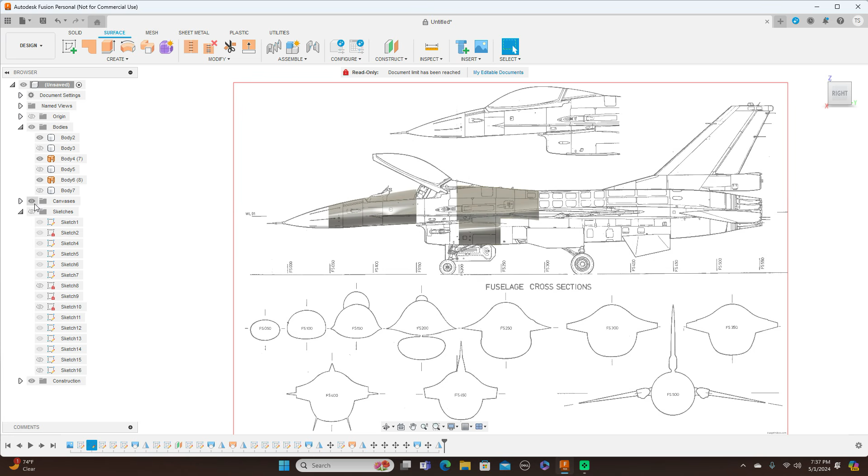Sometimes when you model an airplane, you can't use forms because certain parts are just too complicated, like the intake for this F-16, for instance. It has a different shape up through here. Let me turn this off so I can let you have a good look at it here. Turn off the canvases, okay.

Now what we have, as you can see, this section right through here is flat. So it's actually a couple of parts. It'd be quite difficult to use a form to get that shape up there like that. So if you can find pictures of the formers, use the formers for that shape. This front section up here is just a solid.

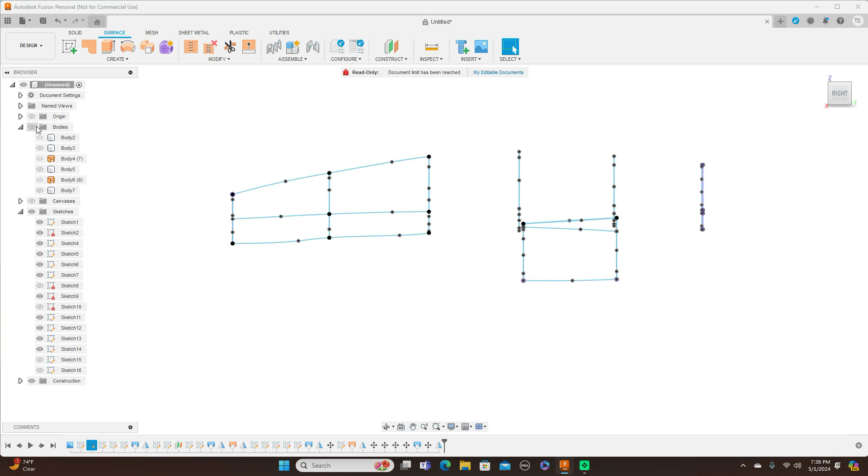And that was done with sketches I drew first. I'll turn the sketches on, as you can see, and I'll turn the bodies off. These are all the sketches that I did first.

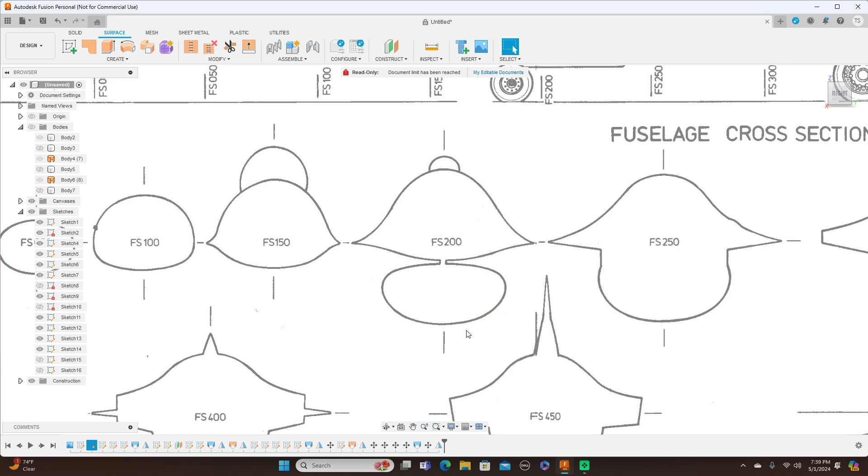Let me go down and turn the canvases back on. This one right here, which is FS 200, as you can see, 200 right here, this former is actually one piece. So what I did is made this into two pieces, and also this one back here into two pieces also, to get the shape right up here that I needed.

Now the rest of this throughout the back, it doesn't have to be two pieces like this here. What I did was separate this piece and this piece right here. So let me show you just something quick here, how I did that.

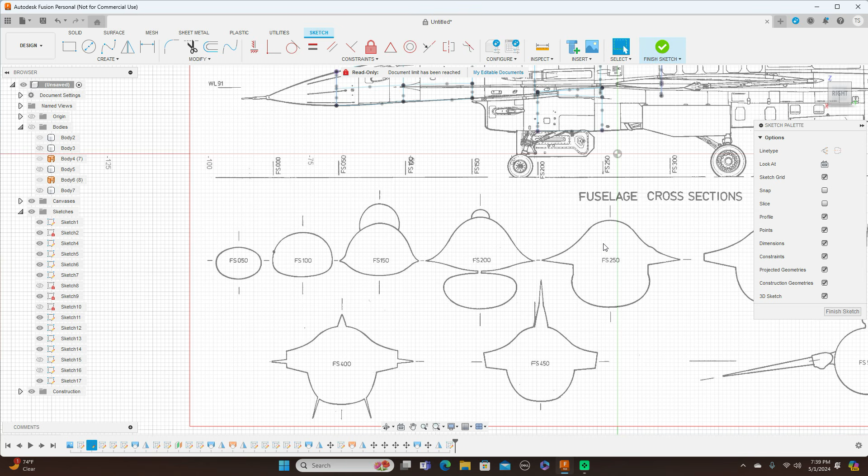So the first half, I just drew a line. It's just one of many ways you can do this. I just drew a line here, a line down here. And these are not the best pictures to use -- they're not symmetrical.

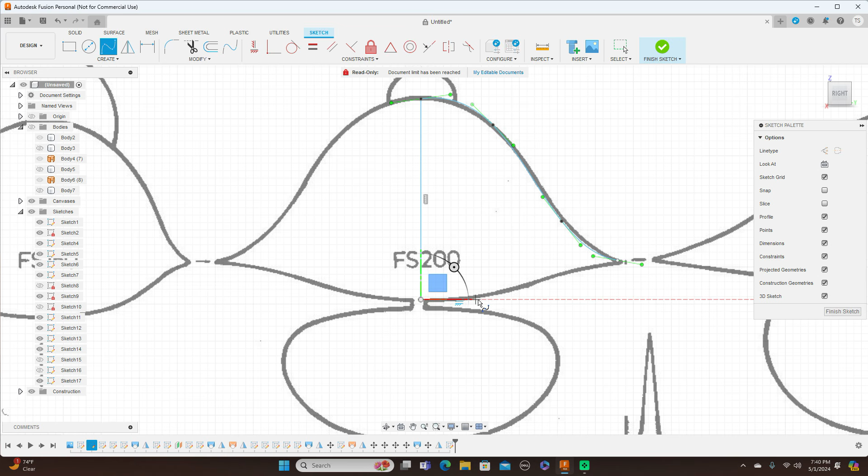Now with this, I make sure that I always have a point right where this needs to be, because that's my line on where I line things up with. And so that's how I did that. Just drew half of this.

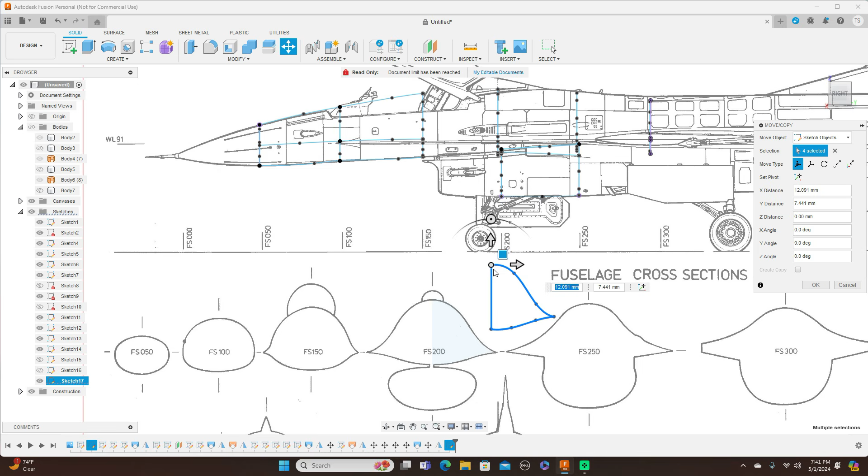Then what I ended up doing after that is just moving this up to here where it needs to be. To move that, you just click Move Copy and select the point that you want to move, and then you select all the pieces of this. Then you move this into place to the top, like I did up here. This one's right up here, and then you just rotate it. But make sure you select this first, because when you rotate this, this stays on this plane right here.

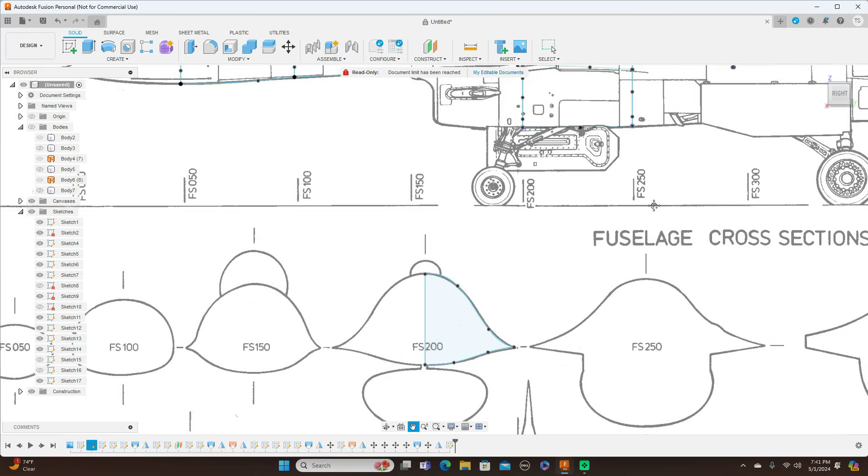But that's why I did that. And then the bottom half to it, like this half down here. Now, I looked at this piece over here too, and this over here.

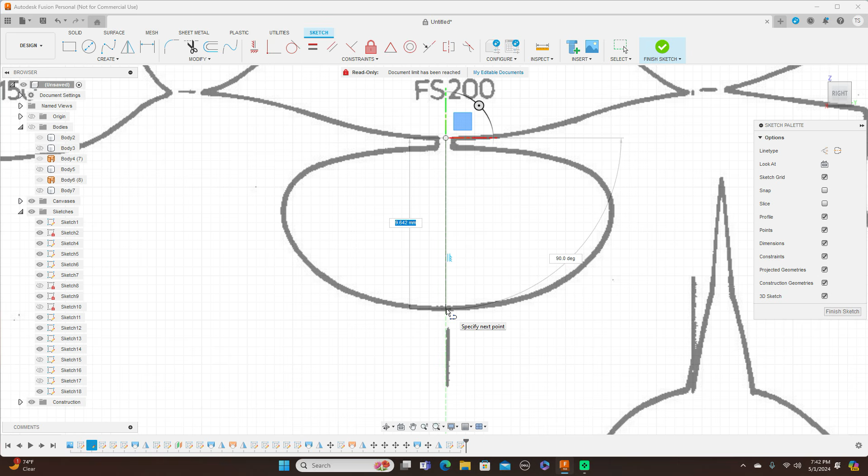And what I am doing, let me turn this off. Create another sketch on this plane here. Drew a line first, and I drew it up to here. Then another line.

Now this snaps in all the time. If you don't want to turn off the snap and you just need it not to snap in right away, just hold down the control key and then it doesn't snap. So hold it where you want it, then go ahead and hit it. Then I use a fit point spline to finish the rest of this out.

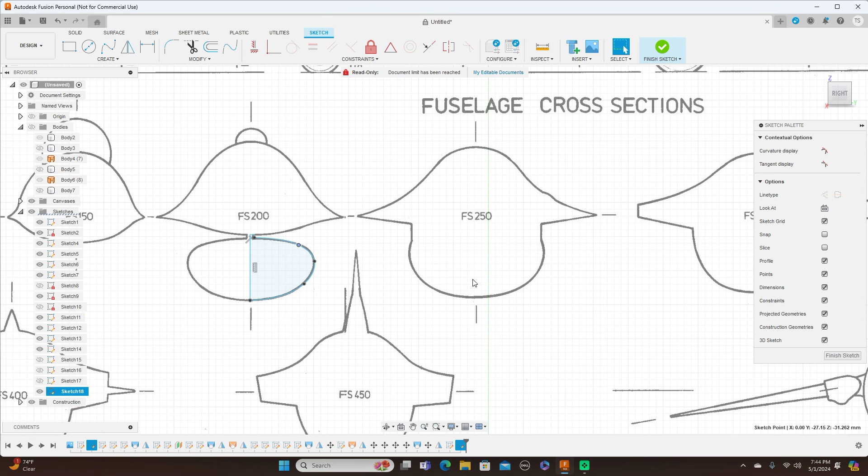And once you got that to where you need it, then I just move this up here the same way, to where it needs to be up here. And also, when it came to this former here, same thing, I drew a line.

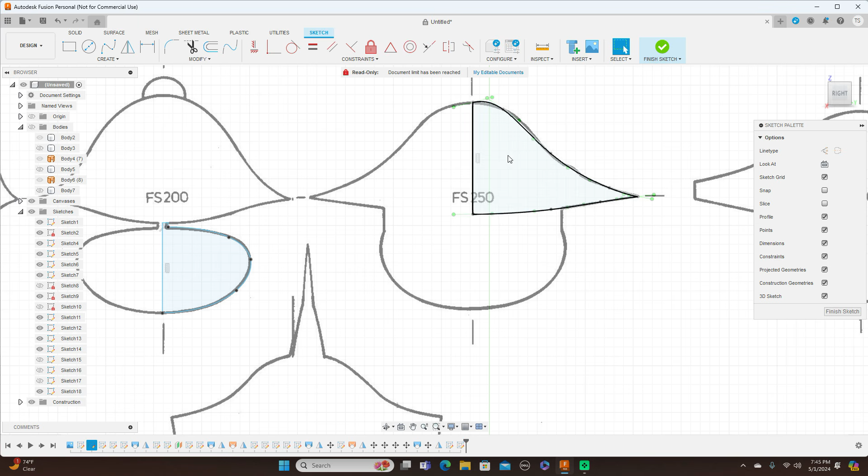About right here. But let me do something first before I do that. I'm going to draw this top portion of it first. So I draw a line from about, just imagine this coming over here towards the center. Click OK, then fit point spline, then another fit point spline, and move this over to here. Okay, so this was the top one that I drew. Let me finish this and turn this sketch off.

And do another sketch, this plane here. All right, let's see here. Draw a line first. I can see about right here -- it could be a little higher if you want to. All right, then use that fit point spline.

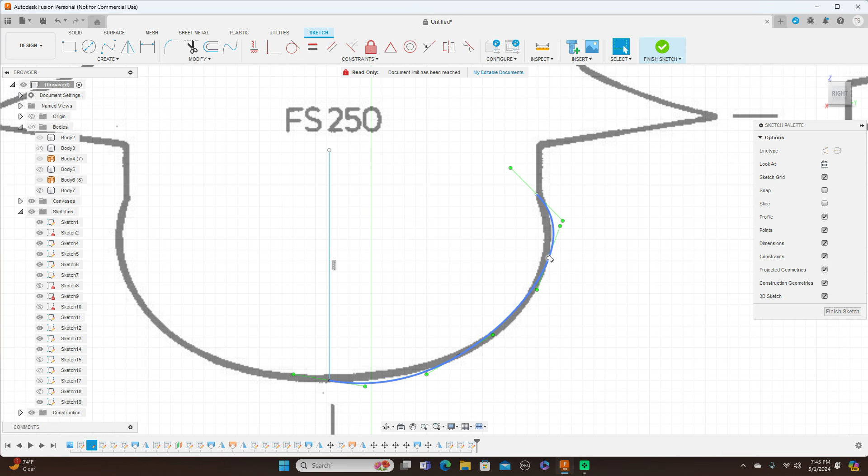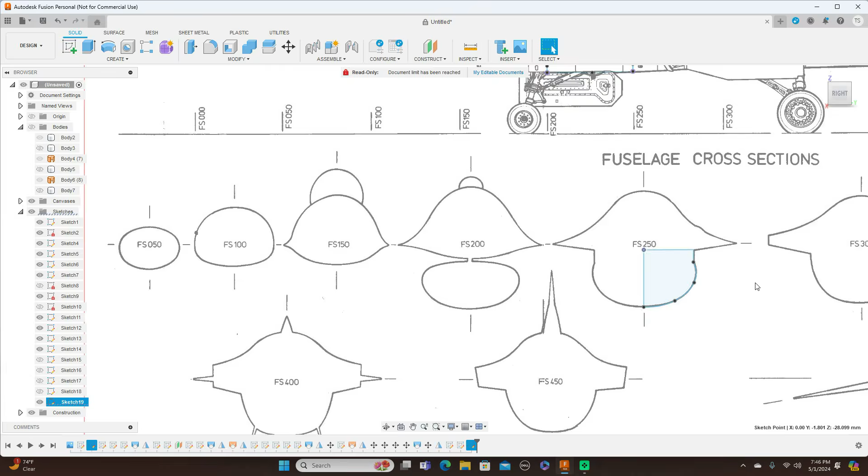And a line. Okay, go ahead and finish sketch. Now we have both of those up there like that. This intersects right through here, which we want, so you won't have an empty space. When you loft this and loft this, there won't be an empty space. But anyway, once you get all your points in here and stuff like that.

Get everything lined up, then you begin your lofting process. It's best to put all of the formers in here at one time. They give you a really nice smooth curve. So what I'm going to do here is just do a couple sections of lofting, to show you what I mean by doing everything here. So I'm going to turn off these sketches, or let's see, maybe just start a new model and do it that way.

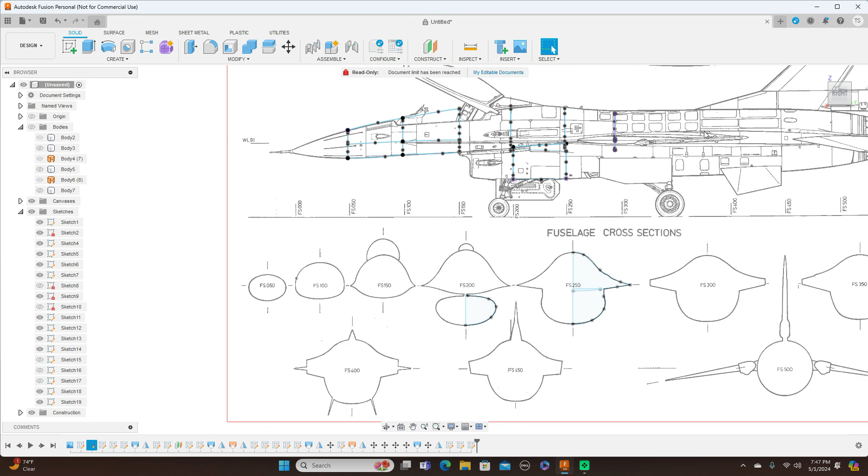Okay, what I'm going to do here, close that, and come over here, File, New, insert canvas from my computer, picture some F-16. All right, open that on this plane here, drag this out. And you can put in the top and the front view as you need it. For now, I'm just showing you guys how to do this.

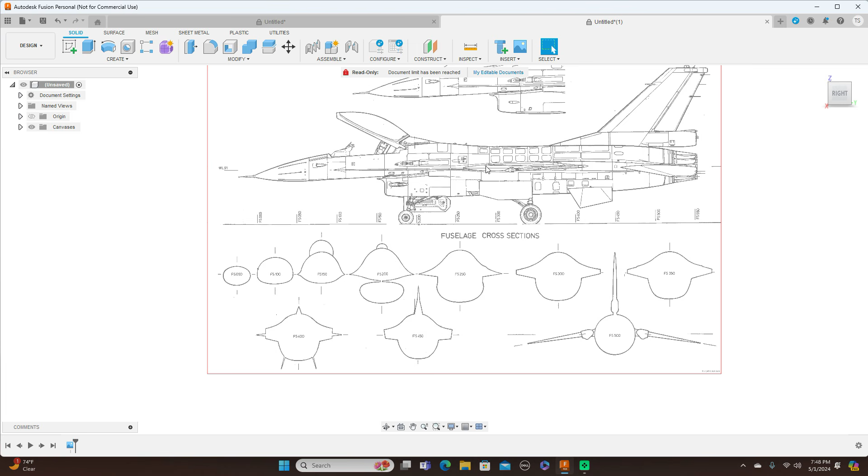Okay, so this is what we have at first. And you can scale this if you want to, but I'm not going to do that for now. I'm just showing you guys how to do this. So,

Let's see, I'm just going to do a couple sections here. So, create a sketch on this plane here. Use the line tool. About right there. Then use a fit point spline. Make sure this point lines up with this line right here. Another fit point spline.

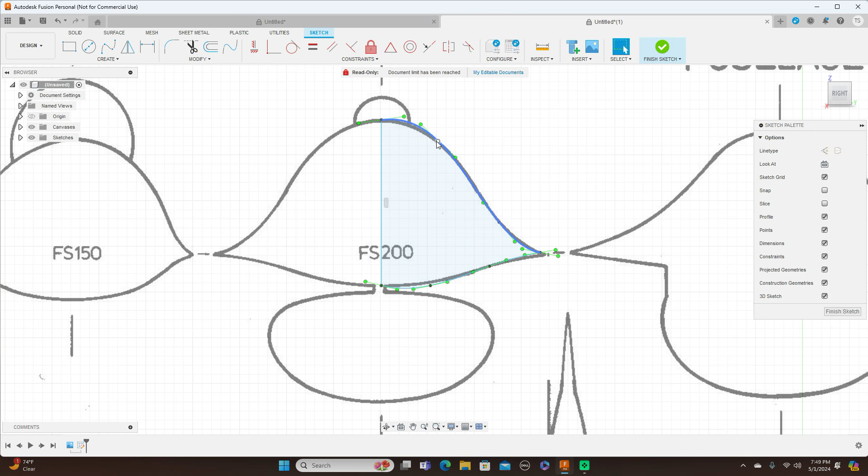Now, the bottom shape here, I'm just going to sort of match that through here too. So, draw a line first. Click OK. Fit point spline. This up. Okay. Okay. And finish sketch.

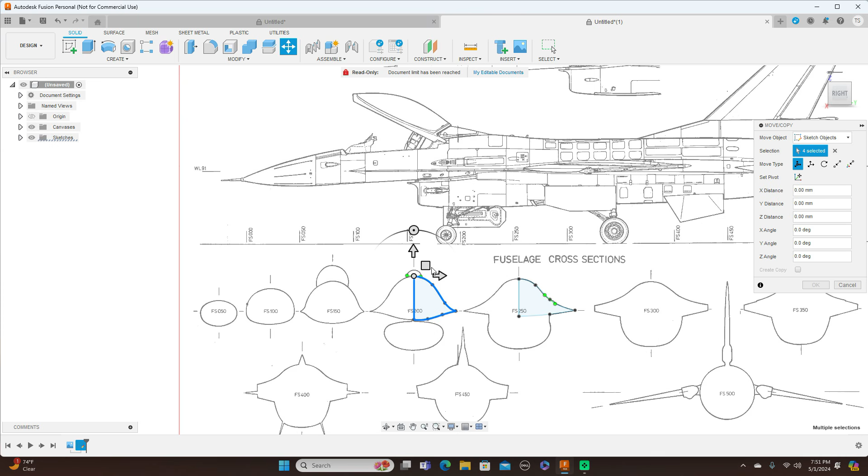And I'm going to move this up to here. So come up here to move copy. And again, make sure this point is selected. And this is the top of the 200. But what we need to do is look at this point right here. So this needs to come down. About right there. Right where this wing is.

Then look at this from the top and just rotate this 90 degrees. And click OK. And move this up. Same thing. Move copy. Point there. And move this up 250.

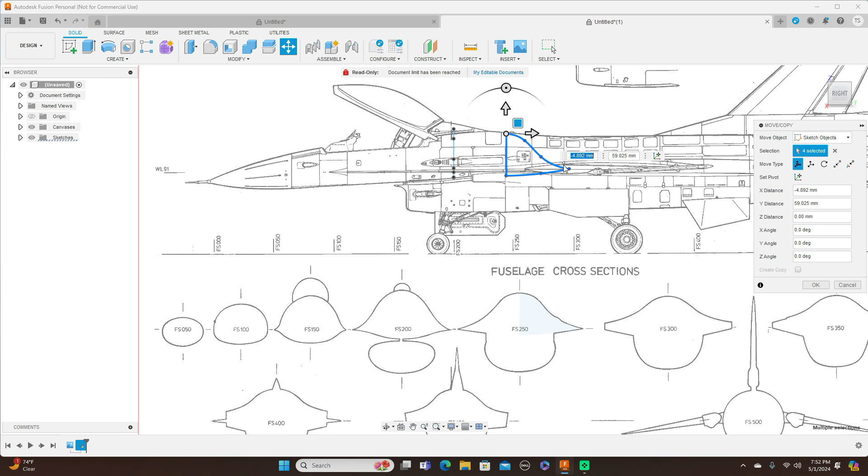Again, we're looking at this as on the wing. So this needs to come down just a little more, this front one. No big deal for now. Then look at the top. Rotate it 90 degrees. And click OK.

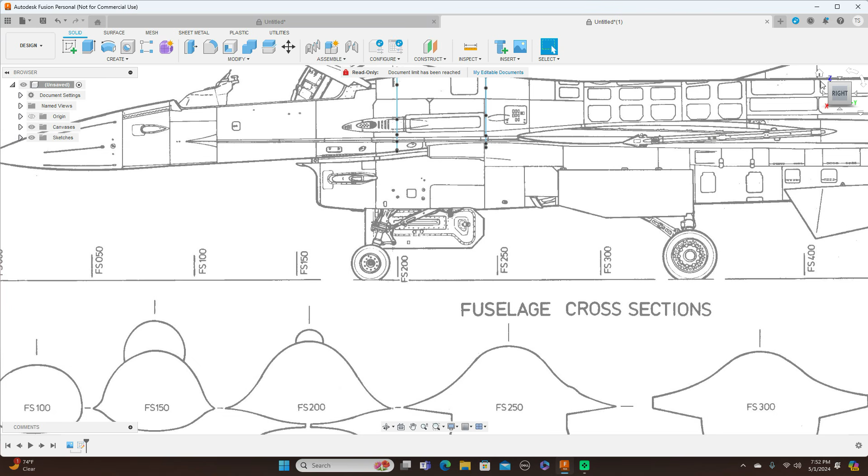Now look at this slightly from the front. And this one needs to come down just a little, not much. Make sure I got the right one I'm moving. And click OK.

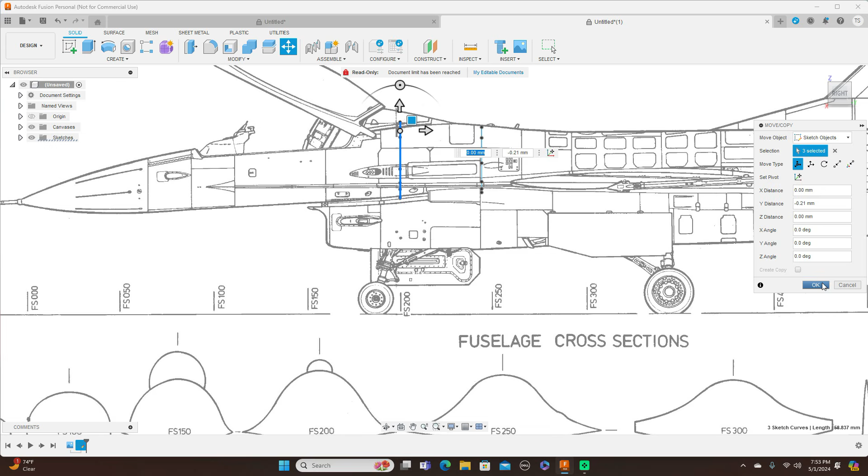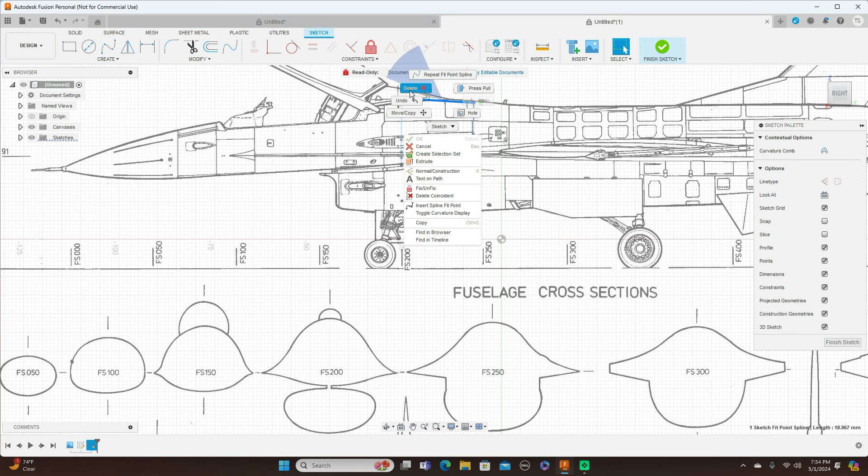Now we have that. So what we do now, come over here to create sketch on this plane. Again, make sure you have your 3D sketches on. Then use fit point spline. Look at this from the... I don't like this, so I'm going to delete this and do that again. And I'm going to use another point up here and here.

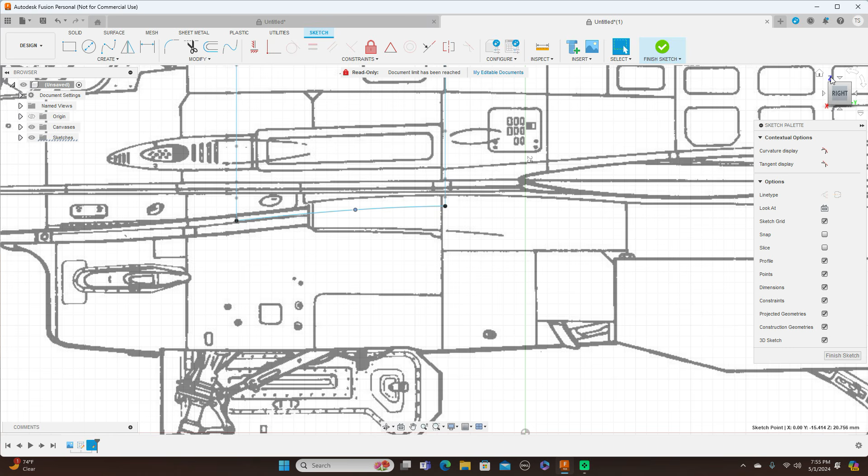And look at this from the side. Then bring this down a little. There. Another fit point spline. The bottom here. And look at that from the side. And that looks fine. Because this bottom piece is going to come up inside of here. Okay.

And another one here. Again, make sure that 3D sketch is on. Move that up. Look at this from the top. Okay, that looks pretty good. And finish sketch.

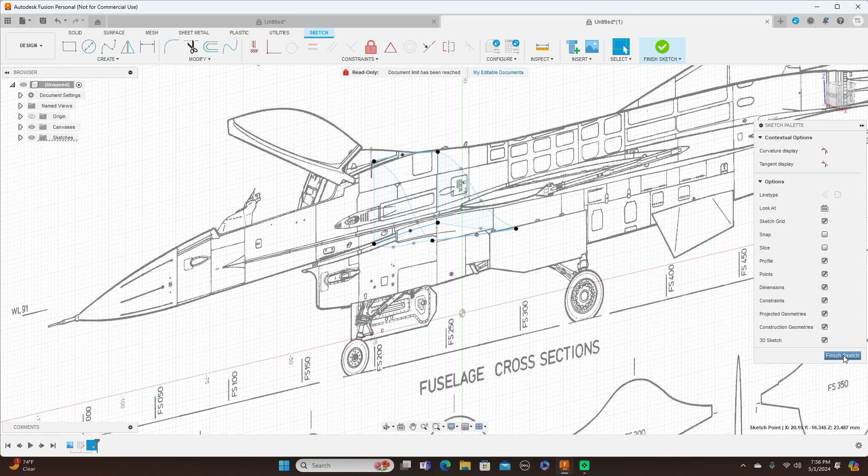And now what I'm going to do here, you don't have to do this, but I'm just going to use surface and loft this to this. Oops. Make sure this is 0 before you do this over here. I didn't do that. Okay. Then we want rails. This is a rail. This is a rail. And that one. And click OK. And there's our first section in there.

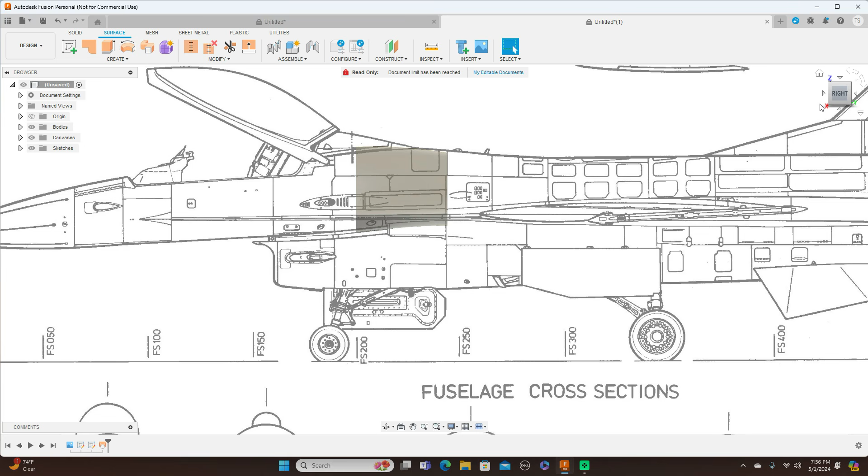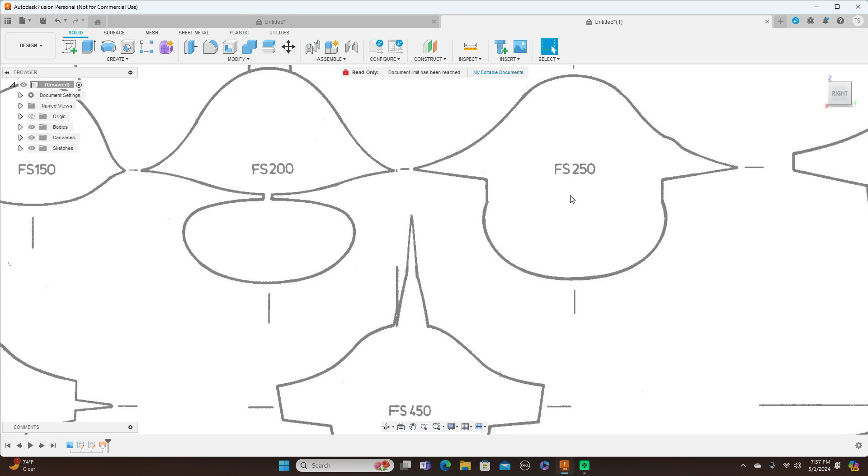And now what I'm going to do, it's the bottom half of these two. Come back up here, solid. And create a sketch. This plane here. This line.

Let me do another line before I do this. Cancel this. One more line from here to here.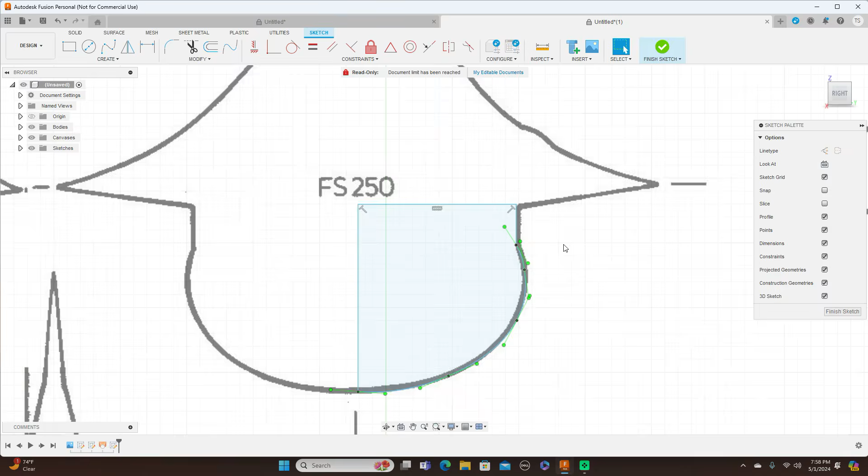Now modeling airplanes this way, if you have the shapes of the formers, is fine. And a lot of times you may have to do it this way instead of doing it other ways.

I'll just show you real quick here. Let's look at another plane I've been working on. Let's see, like this F-100 here.

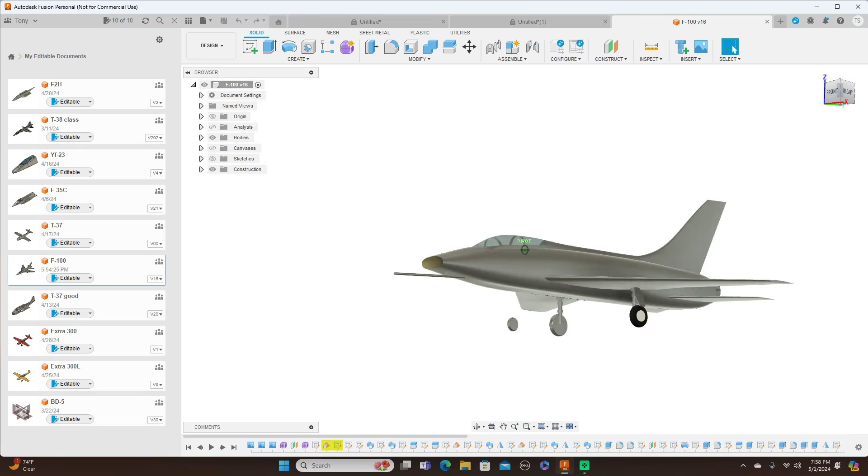Now the shape of this, they turn the canvases on. Now, the shape of this, if you have the formers, you can use the formers because there's no, not the form, yeah, you can use the formers, and or you could use forms. It's up to you which way you want to do that.

The formers may give you a more accurate shape, and again, the form, just using the form, can give you an accurate shape as well. It depends how well you model with forms. So something like this is not a big deal to use the formers or the forms. It would just be up to you which one you want to use.

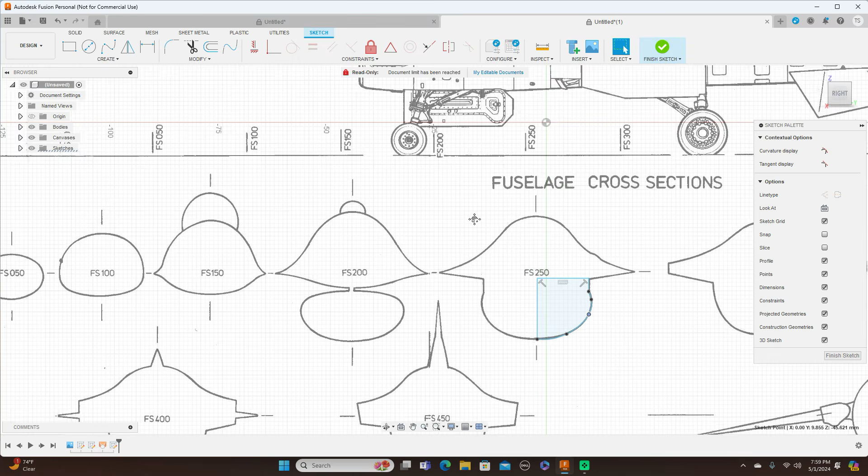Okay, back to this. Now I'm going to draw this lower section here. Draw a line. Then fit point spline.

Then go ahead and finish sketch. Turn this body off here. And I'm going to move these two up. So come up here to move copy.

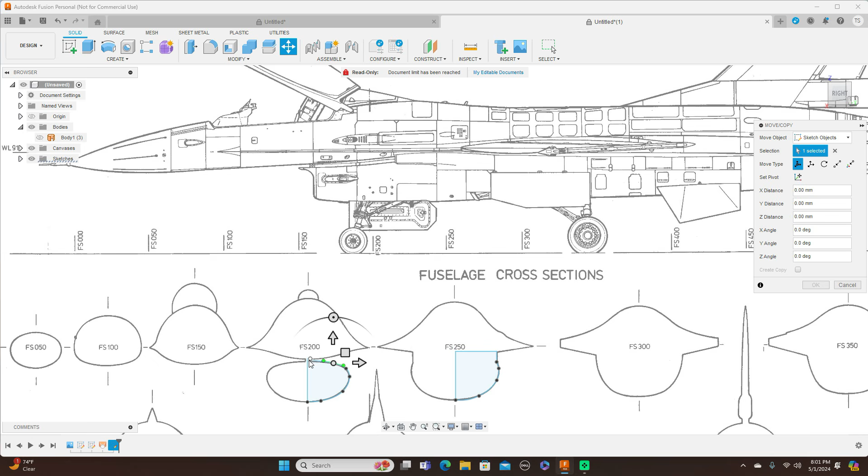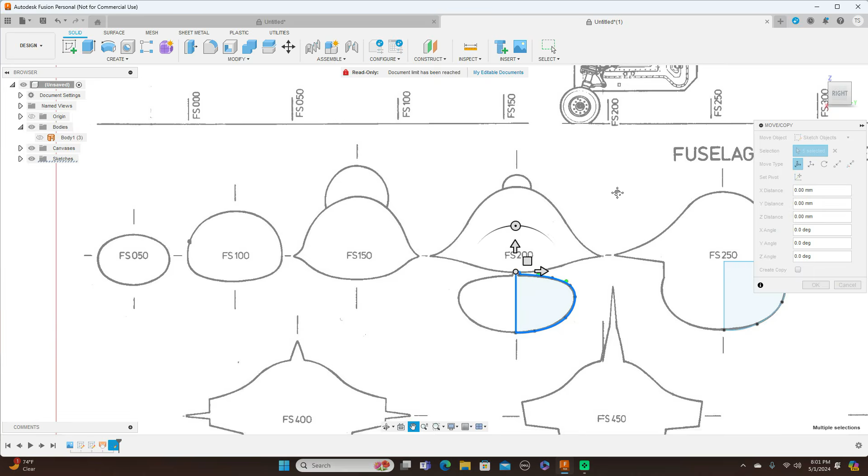Make sure you select everything. Move this up here, and click OK. And I'm going to move this up.

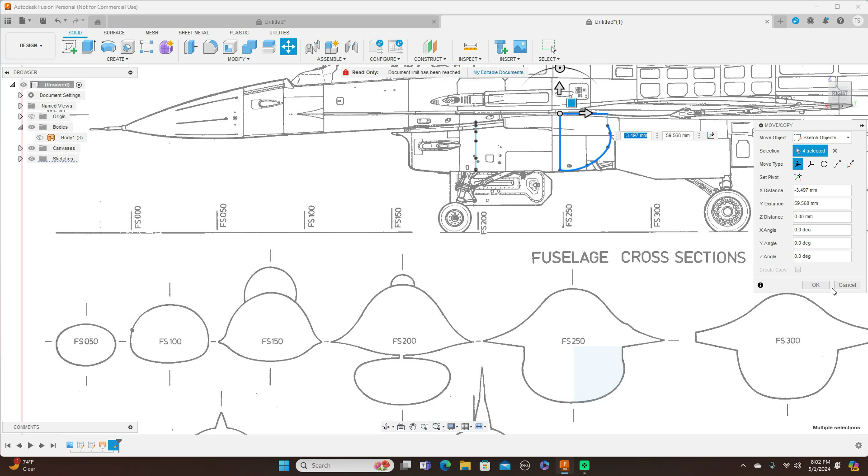Look at the top and rotate this 90 degrees. Click OK. Now we have this. We can turn off the canvases.

Create a sketch on this plane here. Again, make sure you have your 3D sketch on. Fit point spline from this point. Another fit point spline from this point here.

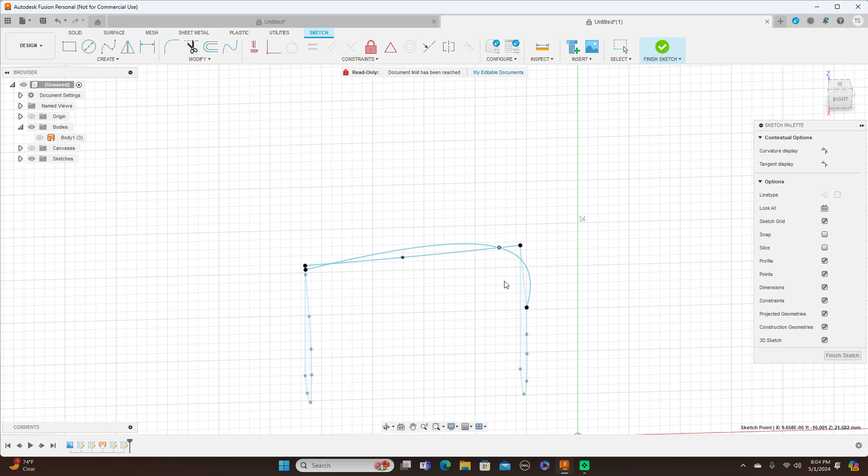I don't know why that's locked in, but delete that.

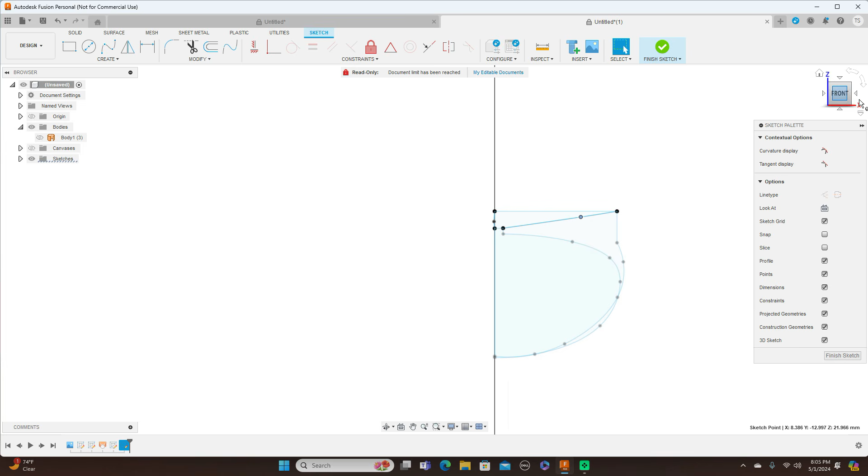Okay. Now we've got that. And another one here. Here.

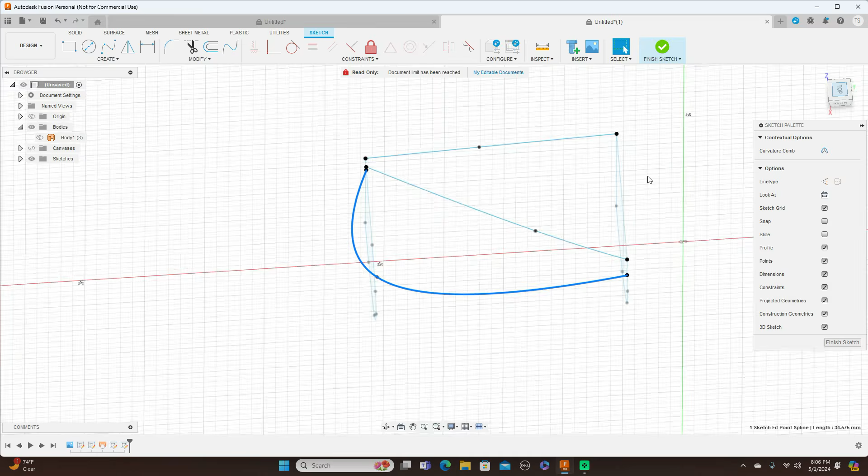And it's all wonky. But I got it all straightened out now.

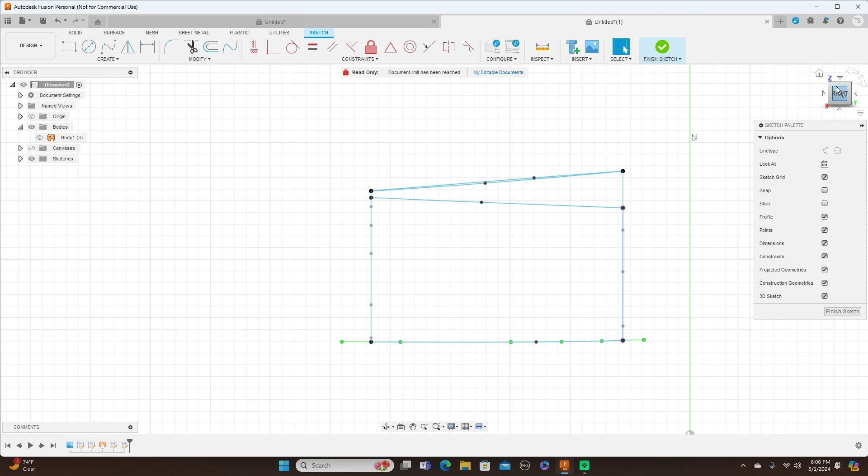Okay, and we'll do another one from here. And I'm going to project this line here, a curve. And we draw another one from here to on here. And click OK. Go ahead and finish sketch.

And see what we have here now. And loft. Make sure these are zeroed out over here. And click OK.

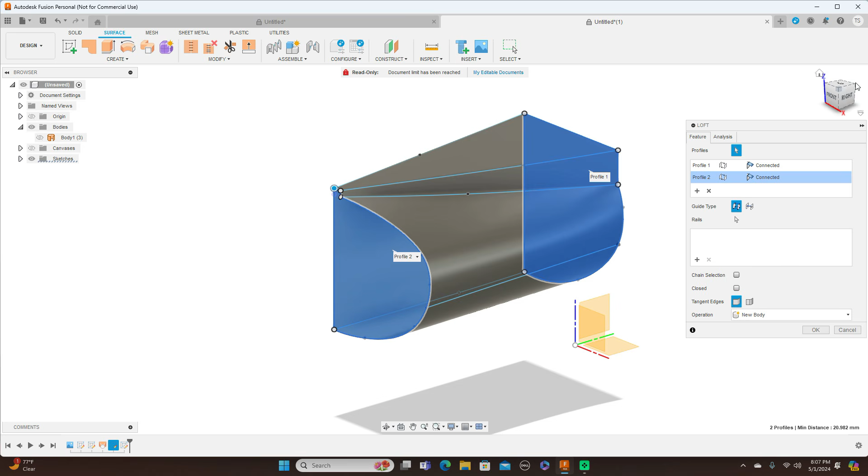Well, before I click OK, I want to add a rail. One sec.

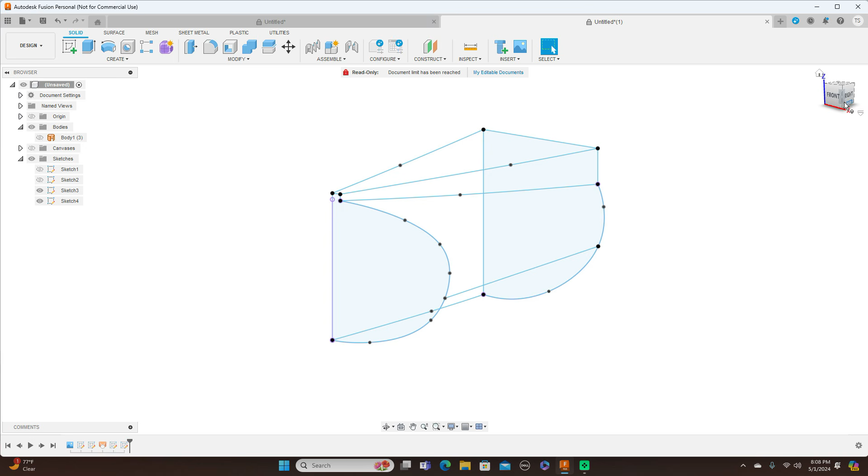One line is not showing up here. Okay, let me do the one line again. Cancel that. It's a fit point spline. Finish sketch.

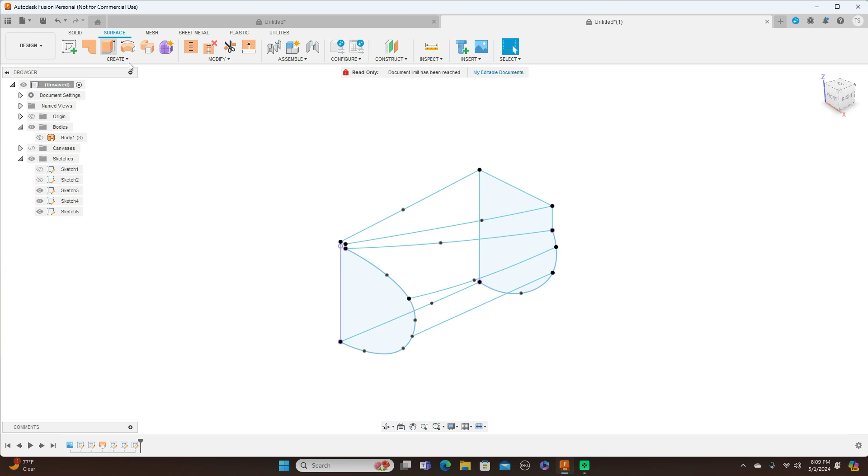Come back over here to, well, you don't have to use surface. You can stick with solid if you want to. I just like the way the surface loft looks.

Then I'm going to add one rail, straighten that out, and go ahead and click OK. Turn the sketches off, turn the bodies back on.

Now we have this here. Now this here, we just move it down, move back to solids here, and come over here to bodies. And let's see, I don't like using that one.

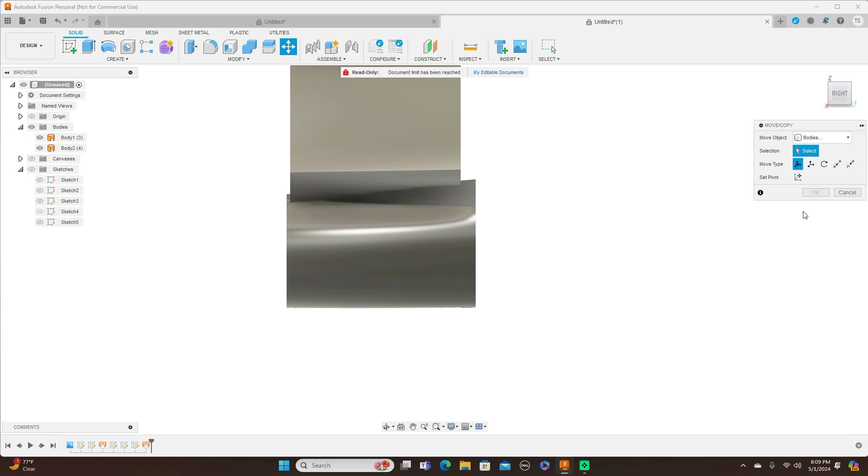Come over here and move. And then let's move this down. And click OK.

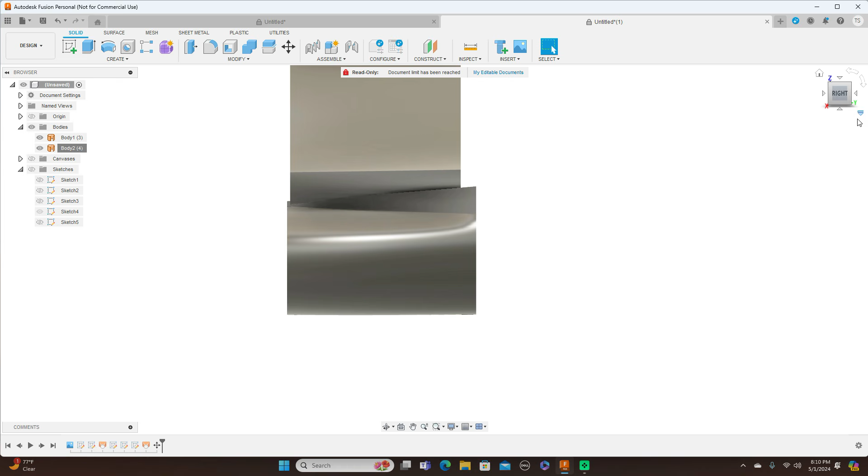And that's what we have. I turn the canvases back on. And that's one section with the intake right here.

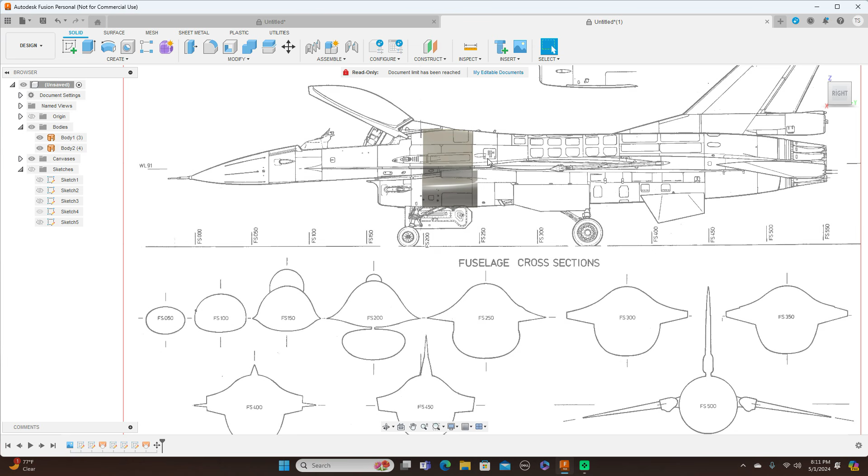And rest of this with the formers on back. You would just draw the whole former and then loft those all the way back. Because the bottom here, it's already here, which will line up to the next one, and then to the next one, those will be fine. So you just go ahead and draw those and then loft those back. Should be fine.

But let's take a look here. And this is round on the bottom, which shouldn't be there.

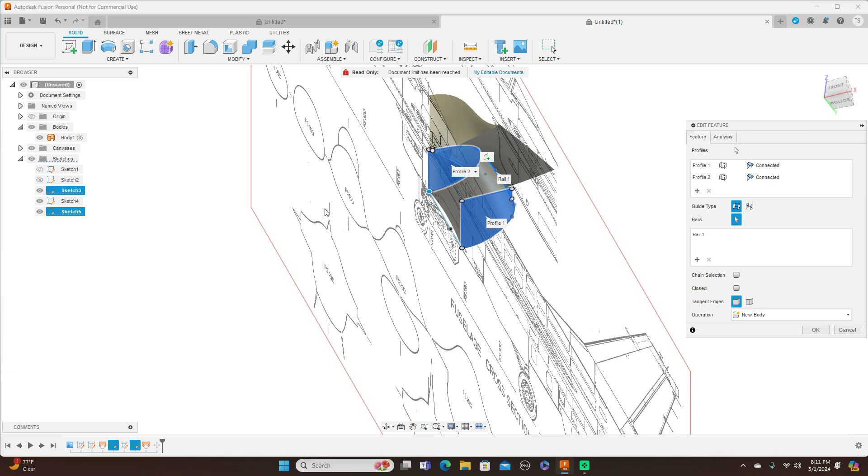So for this particular loft, I'm going to come back and use edit feature. And I want to add another rail, turn the sketches back on. And I'm going to use this and then click OK. Now it got rid of that.

Turn the canvases off. As you can see, this is how the F-16 looks through here. And you can't get that particular shape just by lofting the back shape to the front shape. It will end up looking really weird, and it just won't be correct.

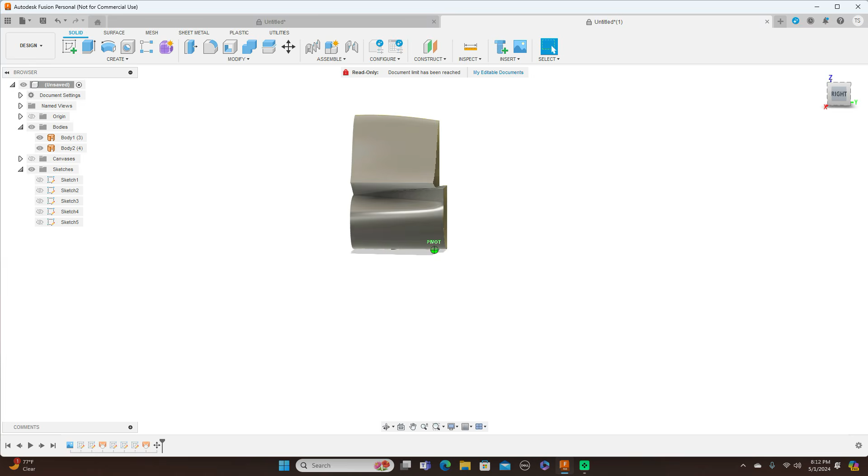So you have to separate. Let me turn the sketches back on here again, or the canvases. Like I showed you, I separated this half from this, and I separated this, and then lofted this portion to this portion. And the rest of this, you don't have to do that.

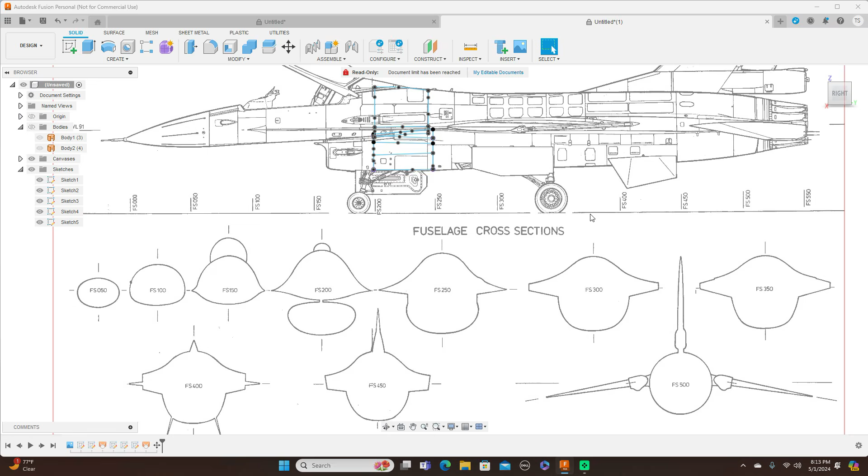So I'll just do one more section to show you what I'm talking about. Turn the sketches back on so I can see. I'm going to do this one and this one.

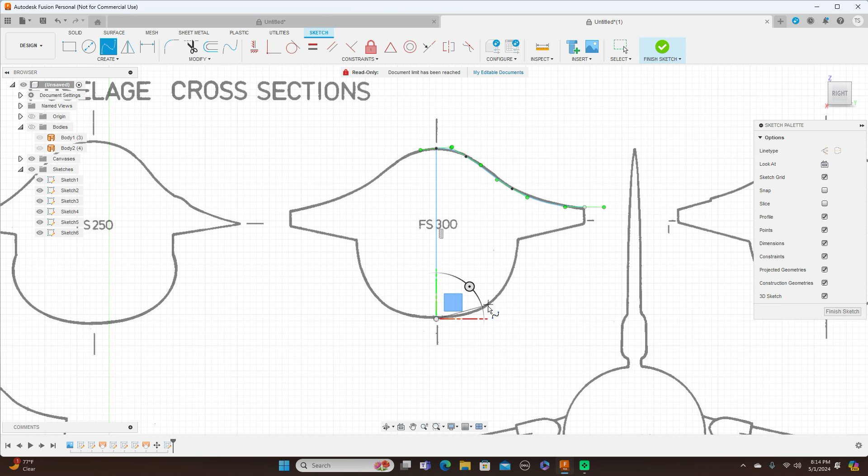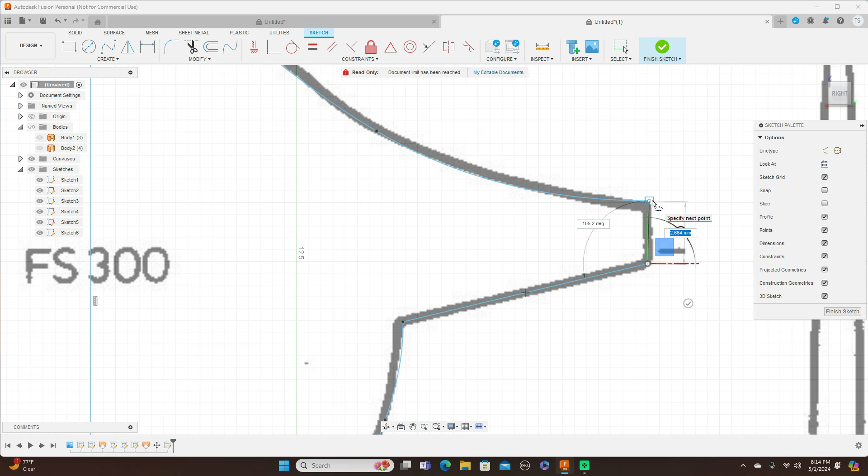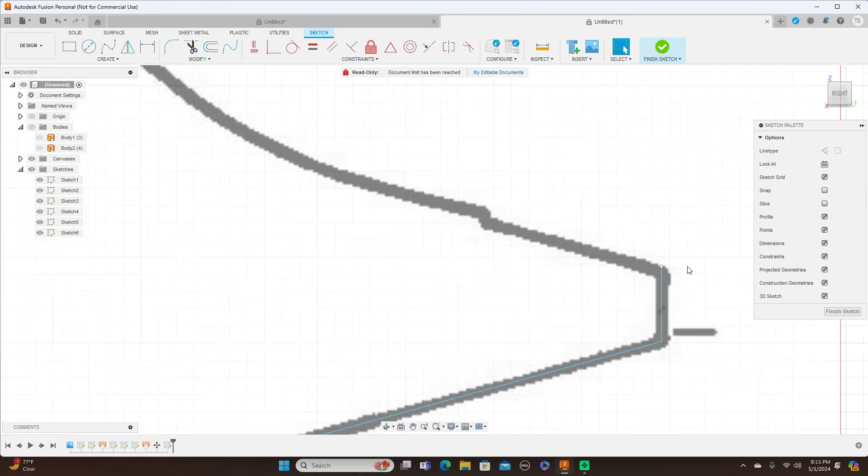So create sketch. Draw a line. And draw a line from here, here, here. And same thing for this one here. Draw a line. Another line.

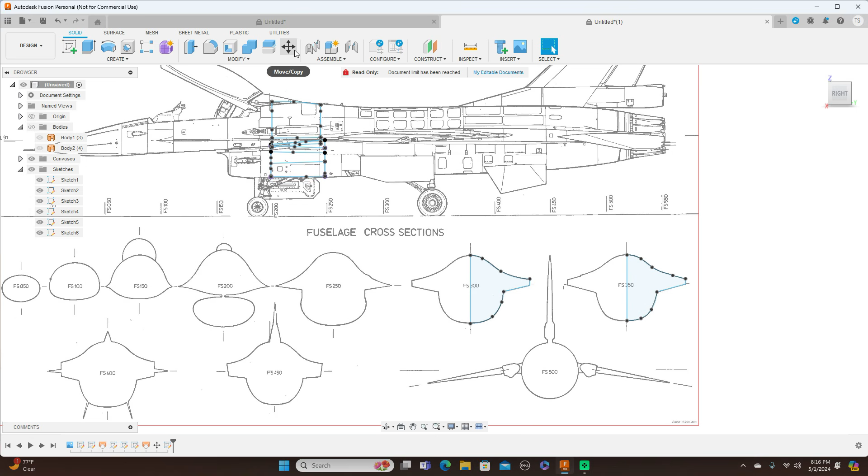Now this is 300, so go ahead and finish sketch. And I'm going to move this up. Move copy, that. Again, make sure you have all the sections selected. Move this up here. And rotate this. Click OK.

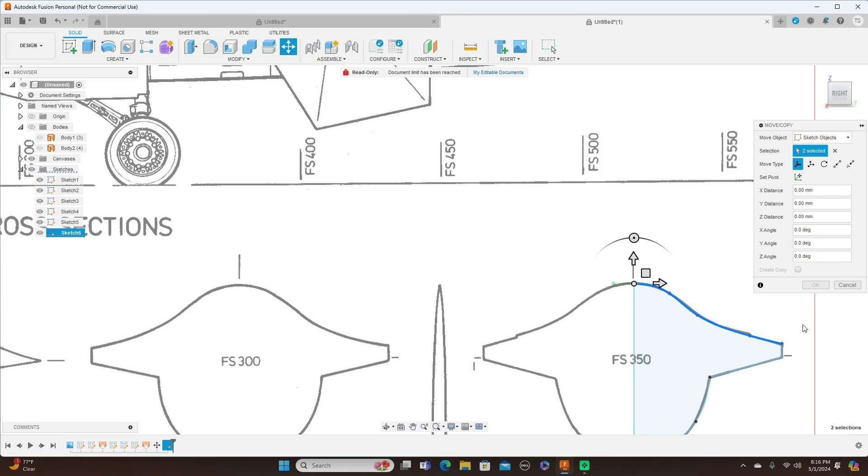Same thing for this. We're going to move this. 350, I don't see anywhere, so I'm just going to place it about right there. And click top view and rotate 90 degrees. And click OK.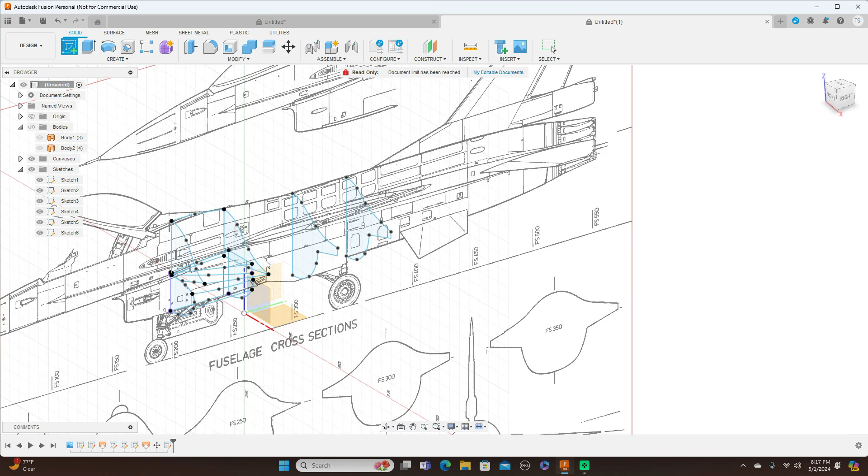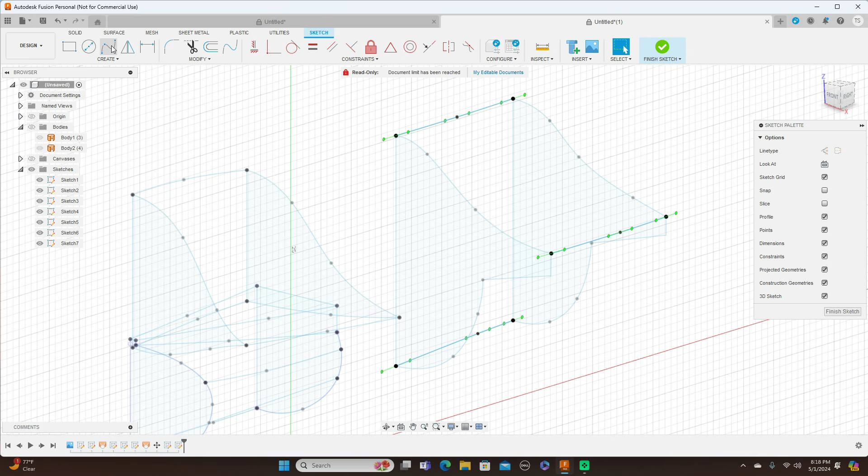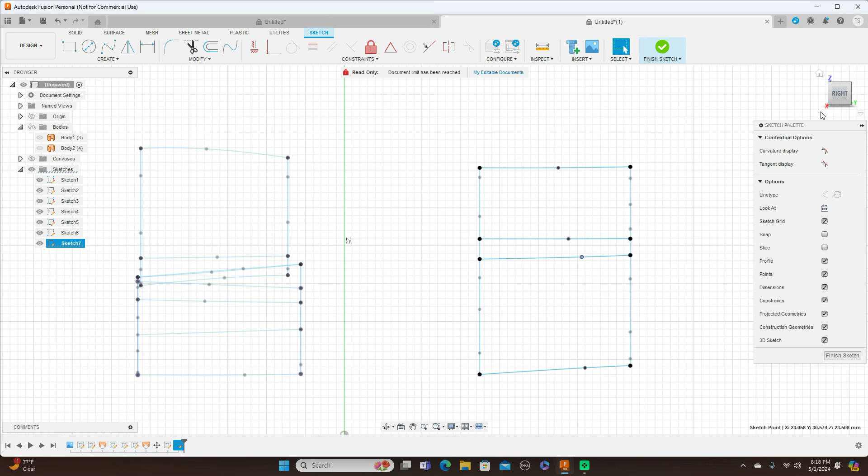And once again, create sketch on this plane here. Fit point spline, make sure the 3D sketch is on. Turn the canvases off, don't need them. And one more. And finish sketch.

Create loft. Make sure these are zeroed out. This. Turn the bodies on. Make sure these are all lined up, and they are, so I don't need any rails for this particular section. And just click OK. And there's that section.

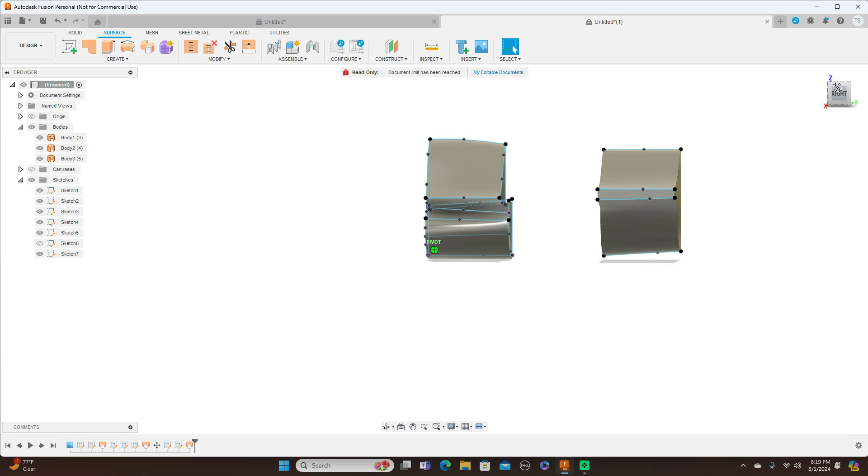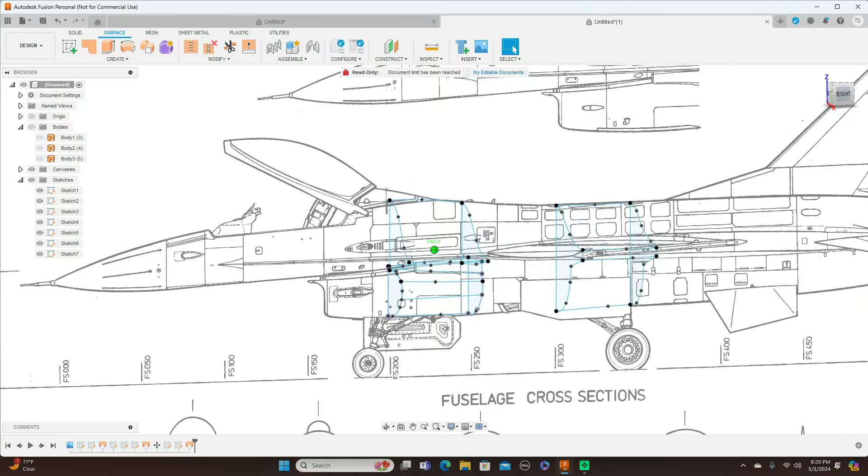But what you want to do, once you have all your sketches in here, you want to loft all at one time so you have a nice smooth body. But yeah, just wanted to show you guys how to do that. This is a little more advanced technique for modeling, but it's still easy to do. It just takes a little more time, and the results speak for themselves. Just depends on how much time you guys want to put into the models you're modeling.

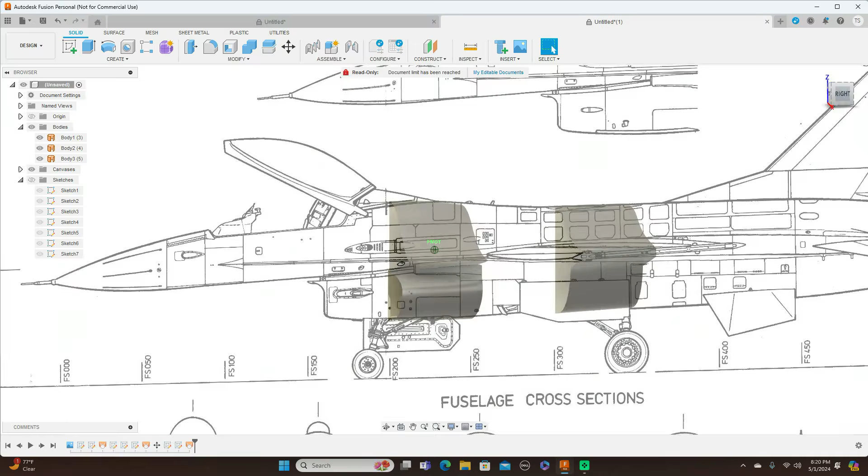Using forms like I do a lot is fine, but sometimes you just can't do that. For forms, you have to model the jet this way, like this F-16. In more advanced jets, you have to model it this way. If you can find the formers, and pictures of the formers, then you can go ahead and do that. And again, it's not that difficult, it's just a little more advanced technique to use when it comes to modeling jets and things.

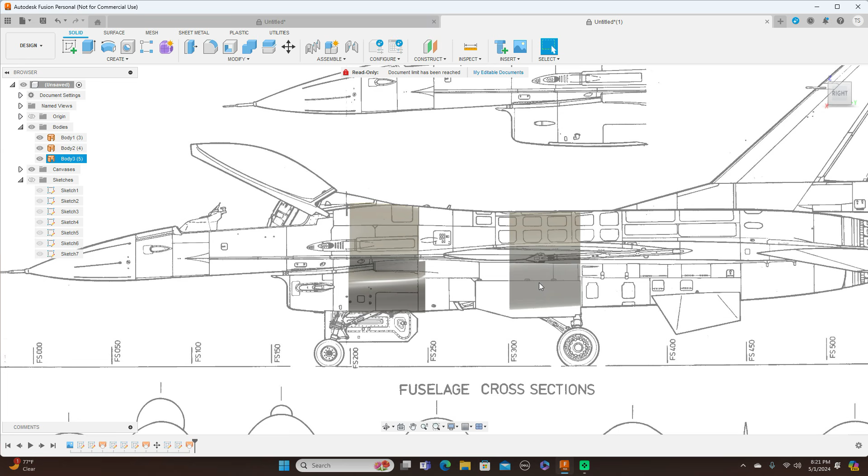And so that's going to do it for this video. I just want to show you guys how to use surface modeling, how to model airplanes. I don't want to sit here for another couple hours showing you guys, I believe it'd be wasting your time. I'm not going to do anything different than what I've done here to show you how to do. I'm just going to go from the front all the way to the back, drawing each one of these formers, and then splitting this right here, splitting this up right here, and lofting these two together separately to get that shape that you need. Then the rest of these all go together as one, and just loft them all together.